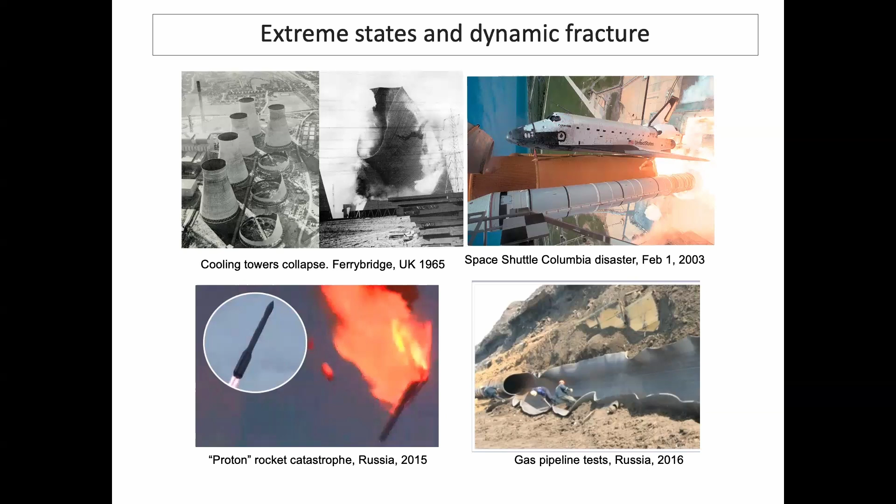It's obvious that crack propagation problems are very important for the industry, especially for extreme states, which are now part of modern technologies. I just want to remind all of us that we still don't have engineering standards for extreme states and for dynamics, and this creates a gap between the academic understanding and engineering applications.

I'm going to talk mainly about the unstable behavior of parameters controlling the dynamic crack propagation, and about an approach which helps us deal with these instabilities and actually simulate them.

At the end of my talk, I want to show a beautiful analogy which allows us to interpret this instability, and came to the conclusion that these instabilities are actually natural, and can be easily understood.

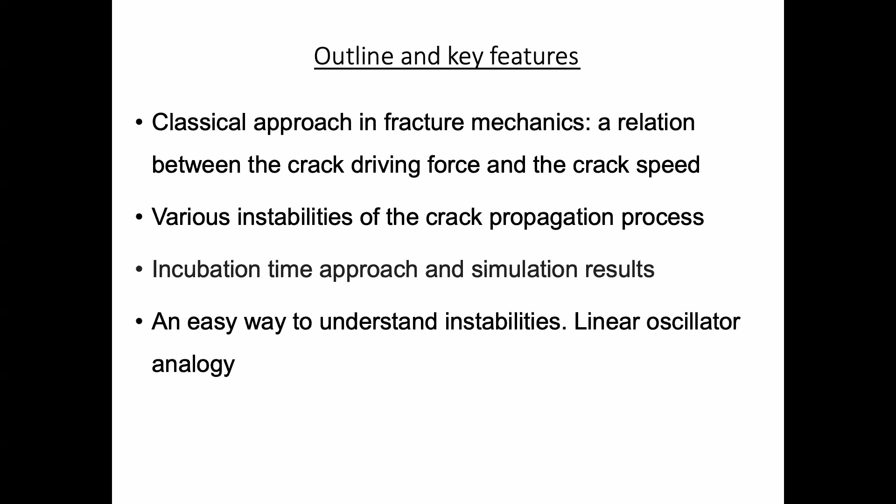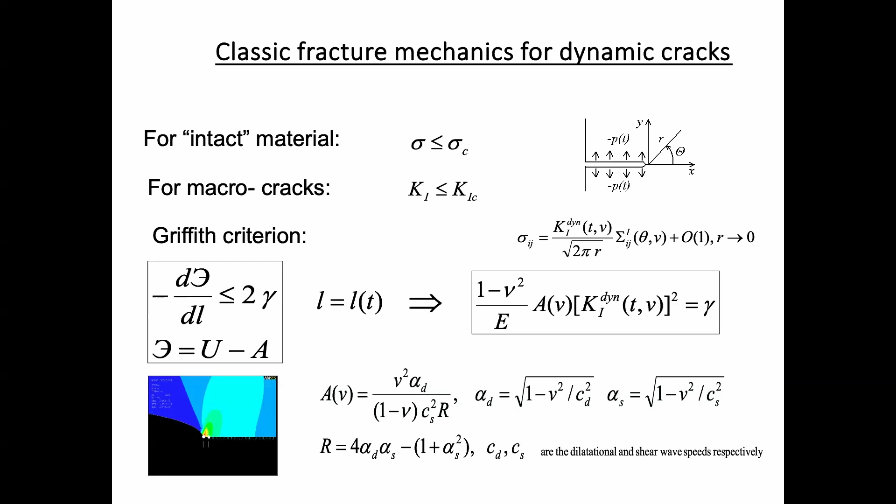This is a classical, well-known approach, and it can be reformulated in terms of the stress intensity factors. That means in these terms we will have the right parts of our relations dependent on the strain rates and the crack velocity.

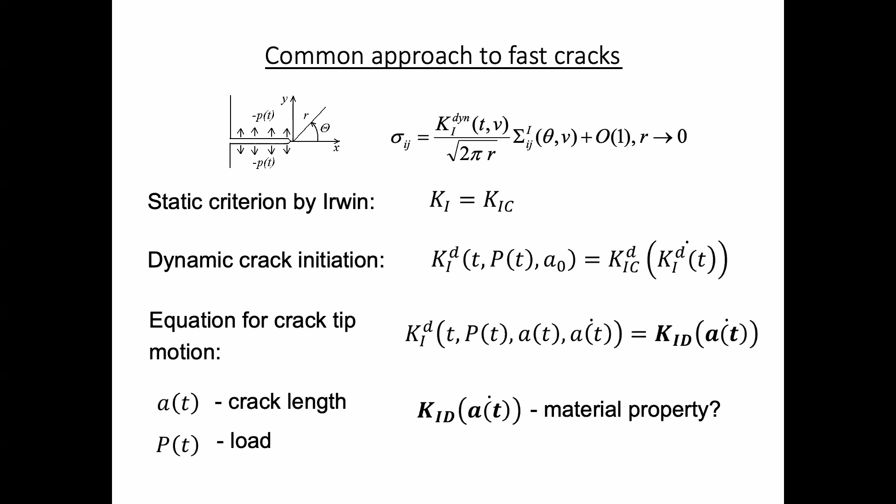So the classic approach can be summarized in these facts: it predicts that the maximum speed a crack may attain is the Rayleigh surface wave speed. This follows just from the previous relation between the energy flux and the crack velocity.

It indicates the unique relation between the crack driving force, characterized in terms of the dynamic stress intensity factor, and the crack speed. The classic model and the majority of its modifications include rate dependencies considered as a material function.

So the static value is just substituted by complicated functionals, for example K1D, which is supposed to be dependent on the crack velocity and to be a material property.

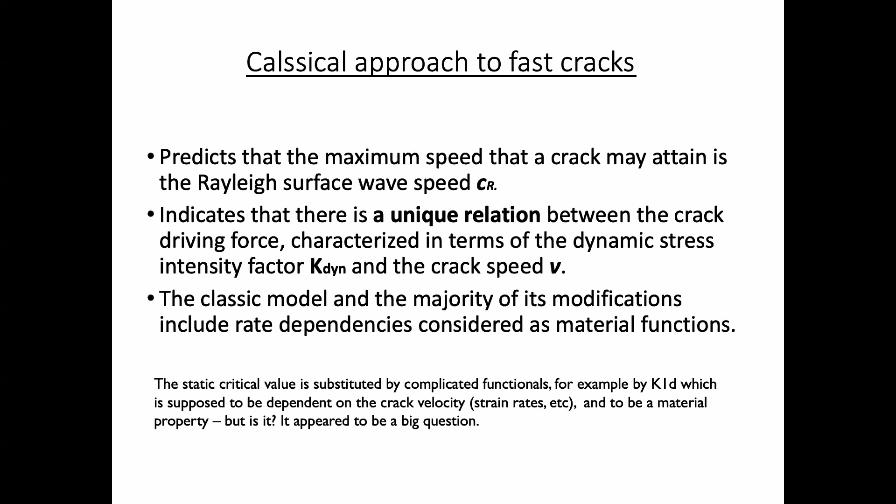But is it actually a fact? This appears to be a big question. So there are some examples of different views on this matter.

I just used the most classic works from the most famous scientific groups. The first one, Irwin and Dally and some other research groups, tried to establish this K-V relation as a smooth and continuous relation for some materials.

The group by Professor Kalthoff and other research groups found that this relation is actually not unique, and it depends on the geometry of the samples. So there are two samples for the same material, and they will show us very different relations.

And the group of other scientists, represented by a series of papers, came to an even more dramatic conclusion: that actually there is no dependence between the energy flux and the crack velocity. They observed straight lines, where the energy flux or current stress intensity factor is characterized by large variation when the crack velocity is almost constant.

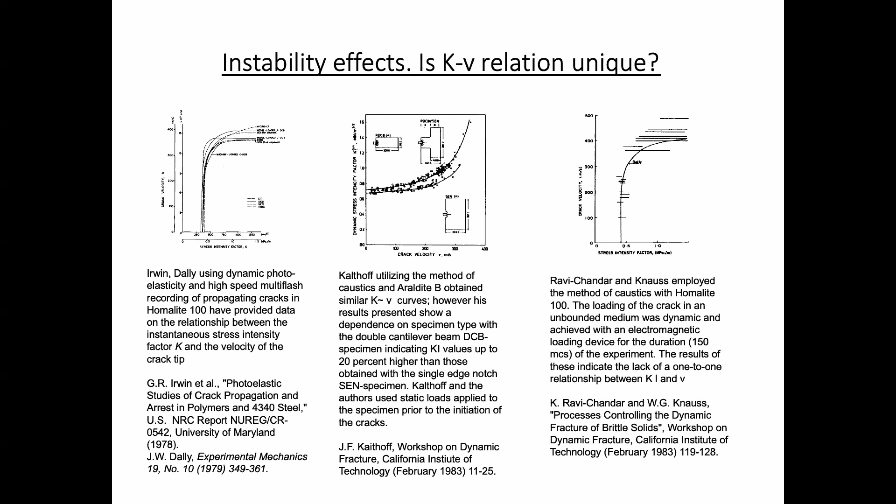Another example of instability is the crack velocity oscillations. This can be represented, for instance, by the investigations of Professor Fineberg - a well-known result showing that crack velocity exhibits unstable behavior.

This instability was observed after a certain critical point, after the critical value of the crack velocity, crack propagation.

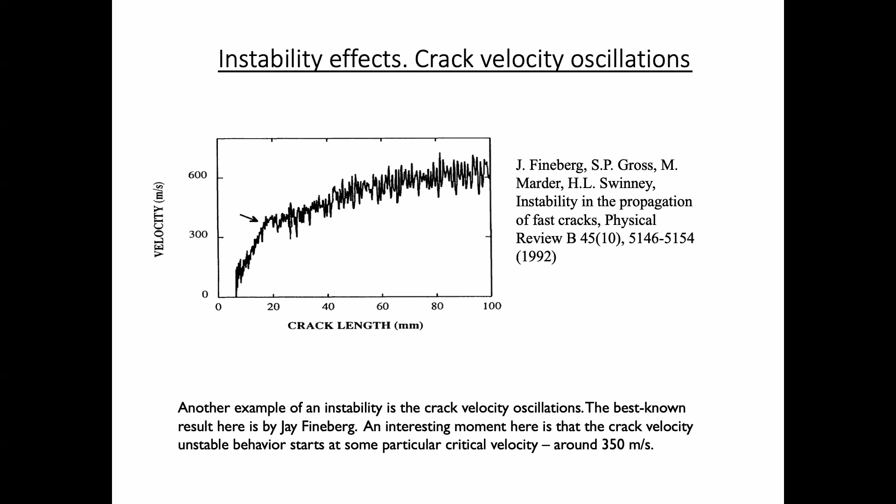Another example of crack instability can be observed even during the start of crack propagation. It's more or less clear that experiments measuring K1D, the starting value of the stress intensity factor, give very different values.

Even for the same material, we can observe K1D that are bigger than K1C or less than K1C. This was discussed in numerous works, the most famous being the work by Shockey, Erlich, and Kalthoff about short pulse fracture mechanics.

They definitively established that for many materials, K1D can be less than K1C, against the prior view that K1D is always bigger than K1C.

For some cases, even non-monotonic behavior of K1D is observed, like in papers by Professor Kalthoff, when he measured the non-monotonic behavior of K1D with strain rate, which first became less than K1C, and then went up and greater than K1C.

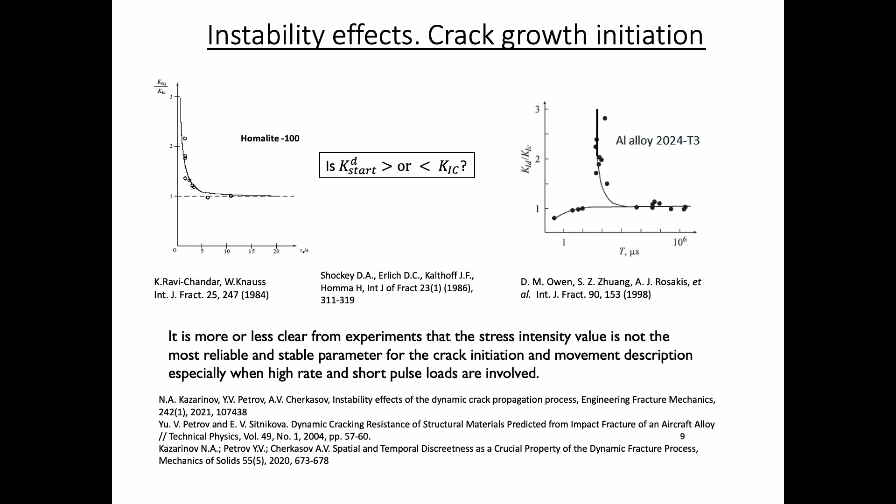We can deal with these effects if we take into consideration some characteristic times, and this is an approach we are developing in our research group.

This approach is essentially non-local in time and in space, so it is based on a special temporal and spatial representative volume. We consider the minimal fracture event, the minimal crack jump in our case, which is described by the D parameter.

It's a linear size. In this way, the fracture scale level is set, and we consider crack initiation. When we go to the crack growth initiation problem, we can simplify this approach and reduce it to this simple criterion.

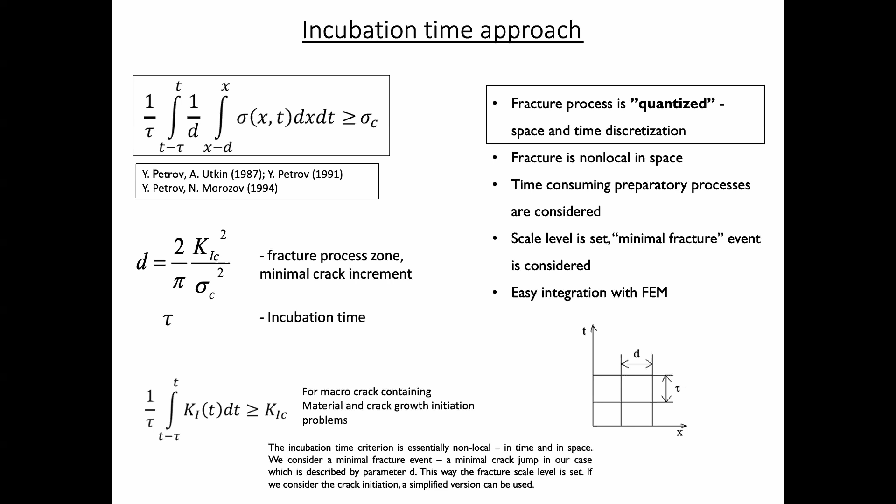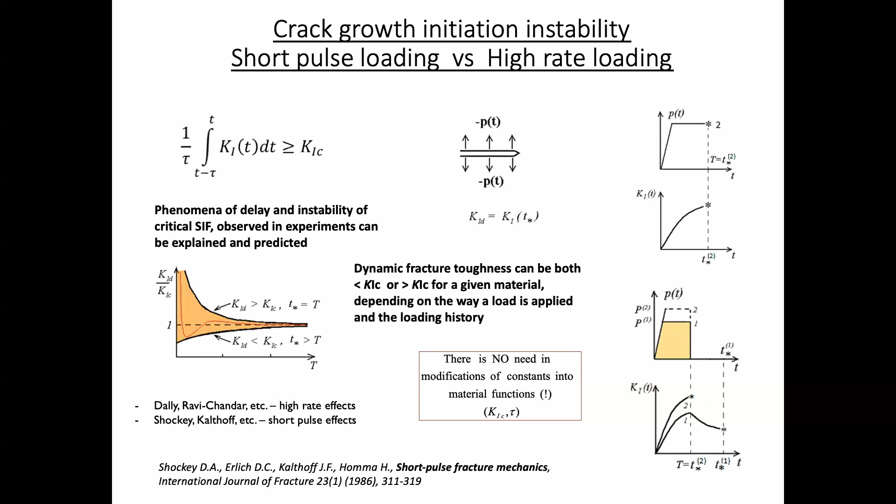So there's no need for modification of constants into the material functions. Only two constants can be utilized to get all these effects.

Let's consider examples of application of the same approach to the crack propagation problem. We consider two problems: the quasi-static loading, which was realized in these experiments, and the problem of impact loading in larger plates realized in the experiments by Ravi-Chandar and Knauss.

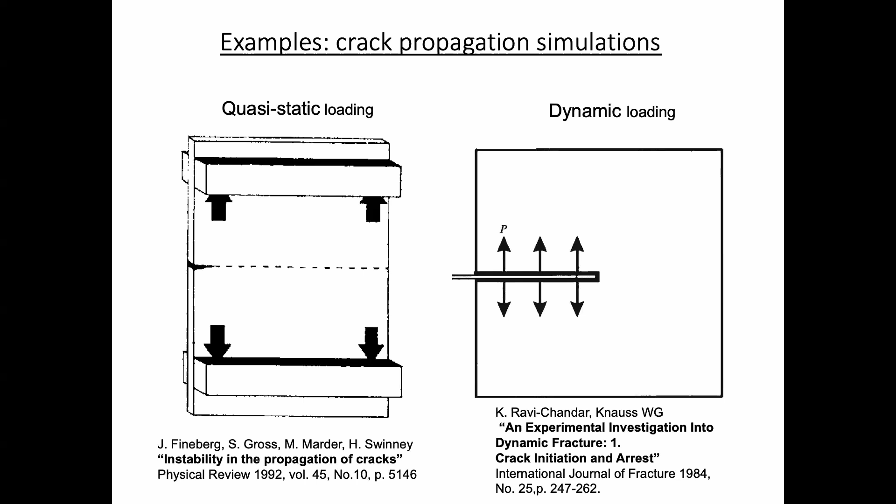The problem can be stated as a linear problem. Small deformations are considered, and no complicated rheology is used—we consider just a linear elastic problem.

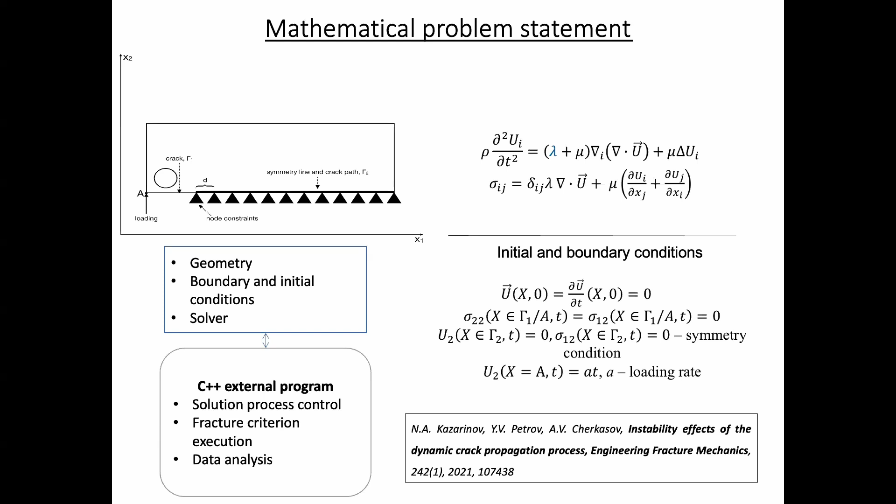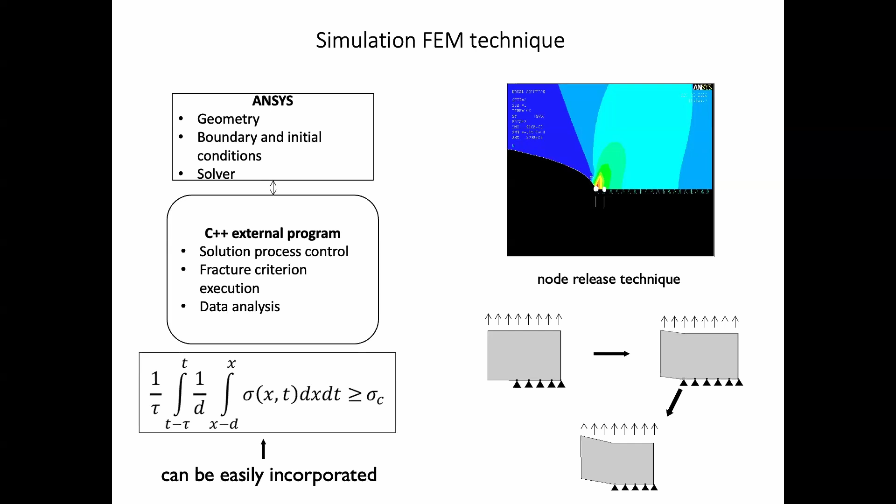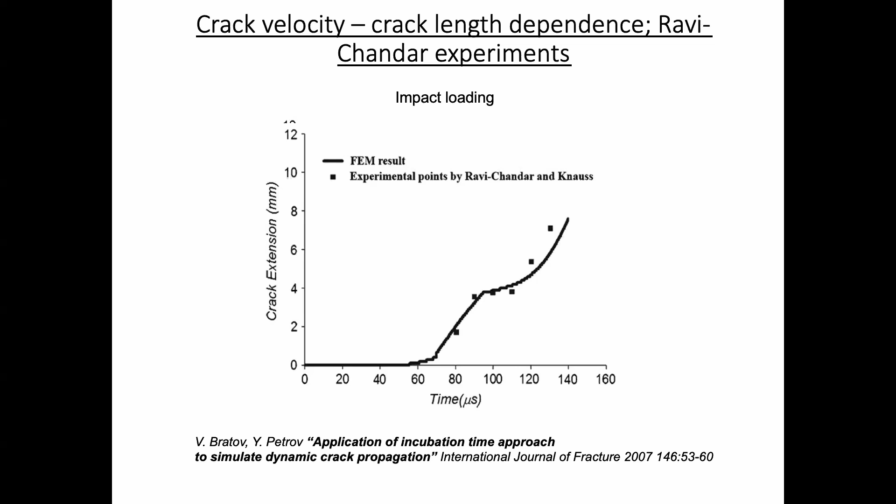This is the simulation technique, and the way we release the nodes according to this fracture criterion. First, the crack velocity in the experiments by Ravi-Chandar and Knauss can be simulated, and this is the result of this simulation, just in the framework of linear fracture mechanics, linear elasticity, and the above-mentioned criteria.

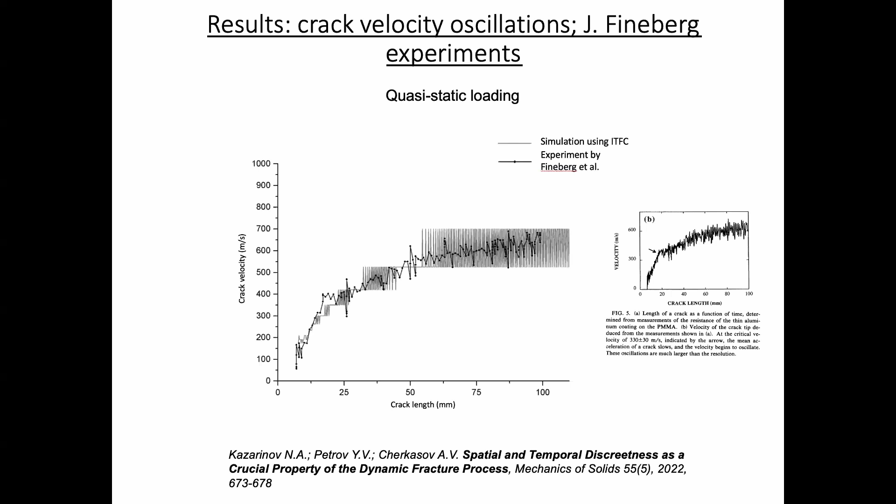And even the critical point, where the amplitude of these oscillations becomes essential, can also be observed here, approximately at the same value.

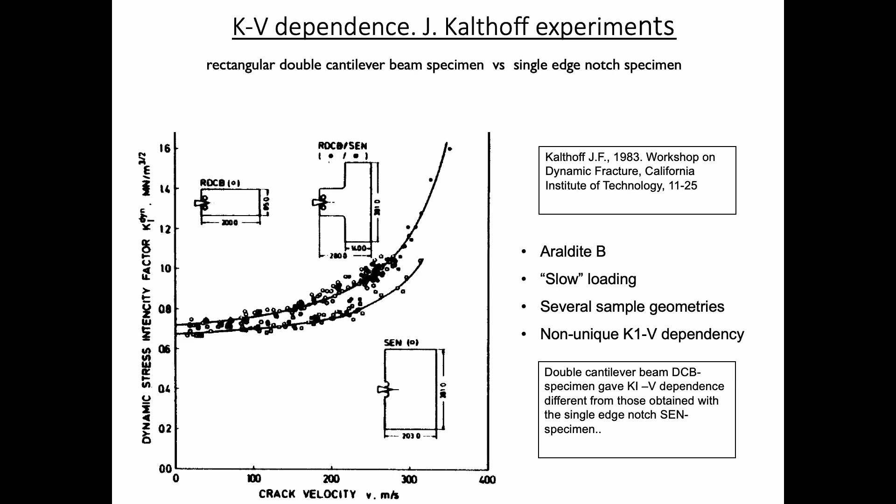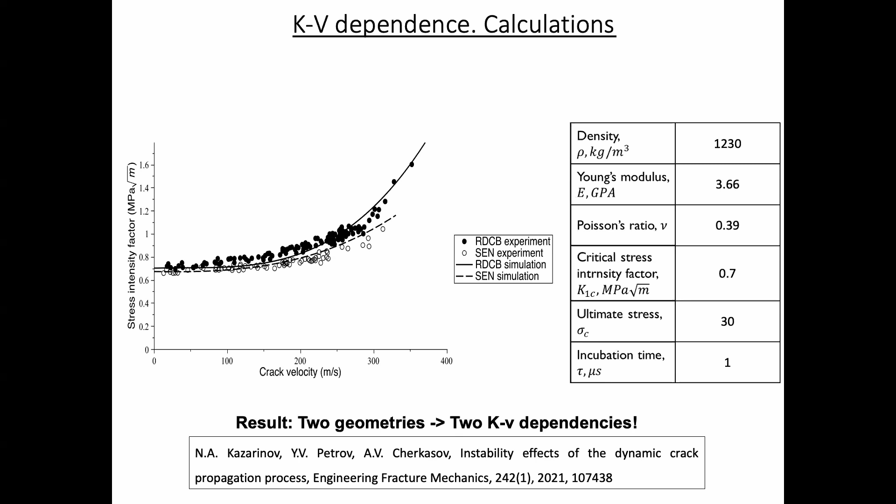Applying the same approach to samples with different geometries, we can get different K-V relations. This is our endeavor to simulate Professor Kalthoff's experiments.

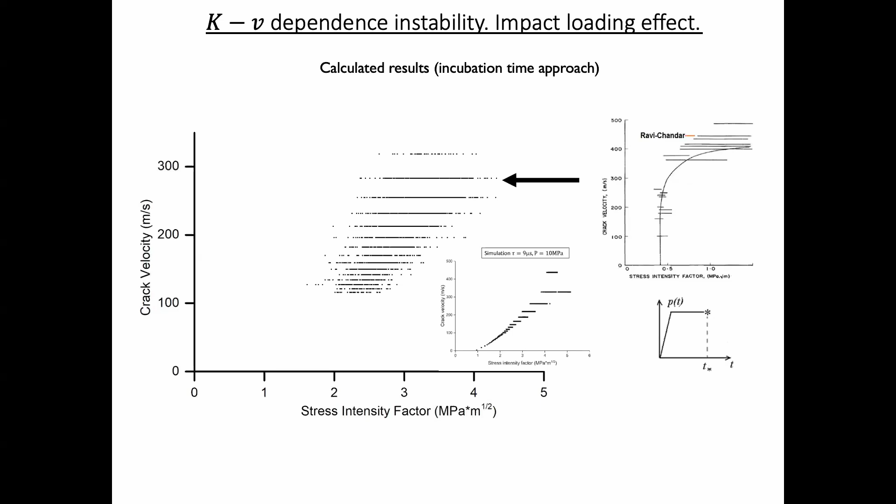The most interesting thing is that in the case of a semi-infinite crack and large plates, we get this kind of relation between crack velocity and the energy flux, or current stress intensity factor. We cannot get exactly in quantities what was observed by Ravi-Chandar and Knauss, but we have this instability in the form that the stress intensity can exhibit rather large variation, while the crack velocity is constant.

So both cases can be simulated: the smooth curve, and this phenomenon observed in the experiments by Ravi-Chandar and Knauss.

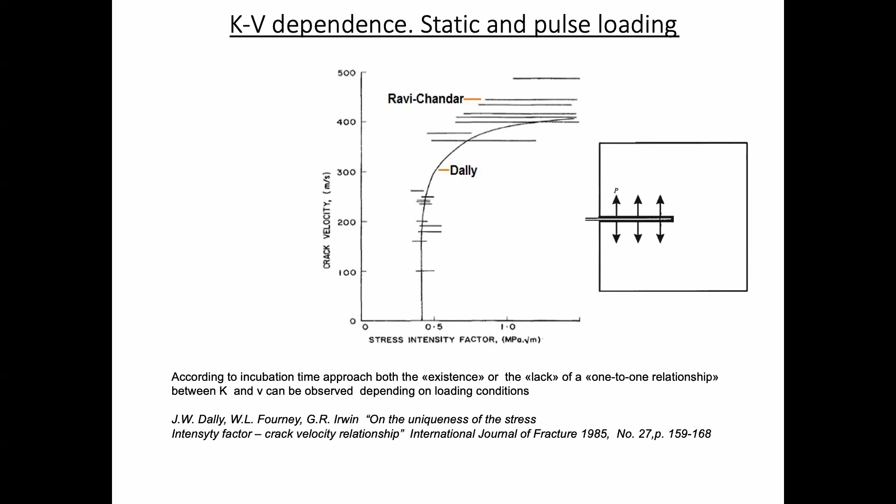And what is between? If we are coming to quasi-static load, then small variation of the current stress intensity factor is observed, and we can apply the classic curve if we neglect this variation. But when we have a pulse load, this variation becomes very essential, and no classic dependency between V and K is observed in this case.

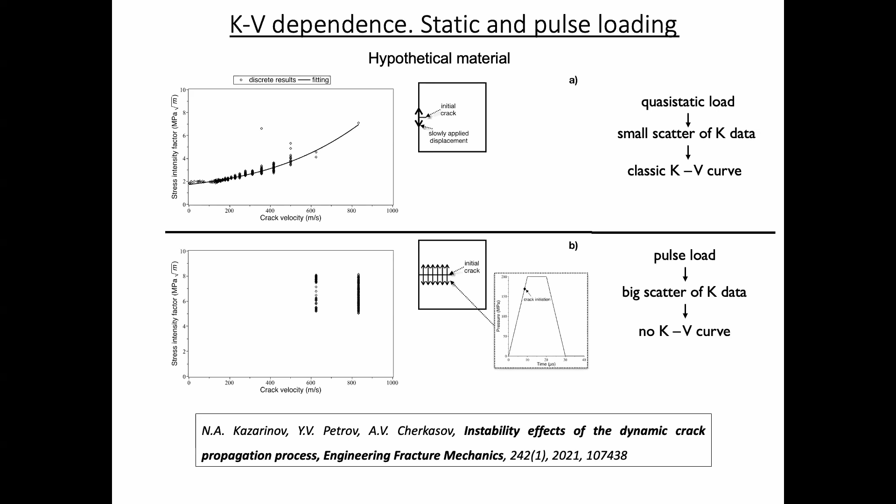Now I just want to show the simplest analogy which allows us to understand all these effects. This is an analogy with the fracture of a simple linear oscillator. On the left we have the oscillator, and on the right the crack initiation problem.

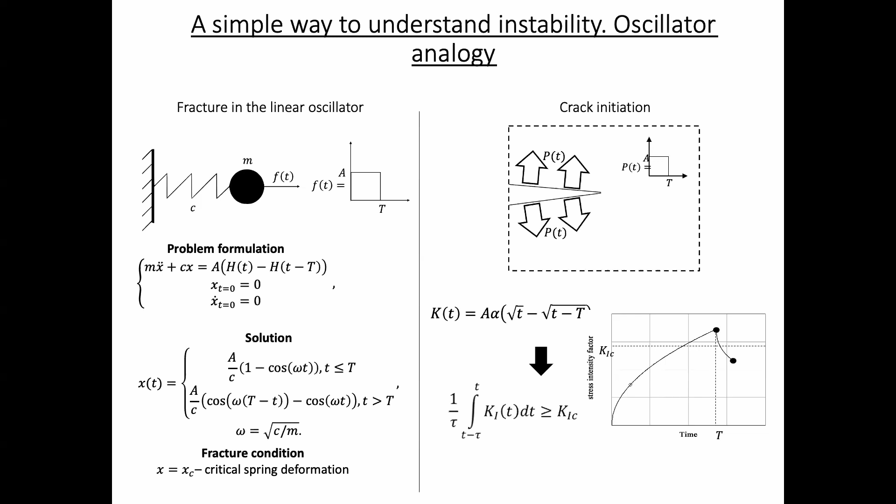Both cases can be analyzed analytically if we take the simplest statement of the problem: in the case of crack initiation, the semi-infinite crack and the larger plate—then all the relations can be obtained analytically, and we try to analyze this possibility.

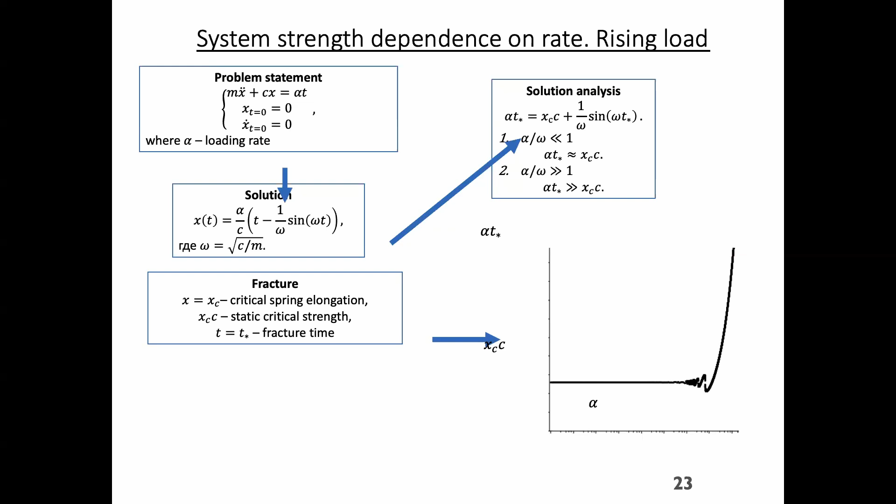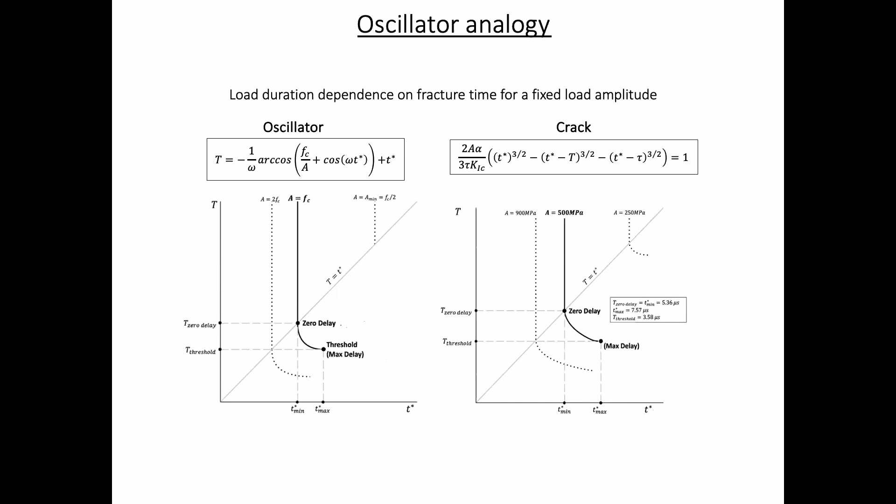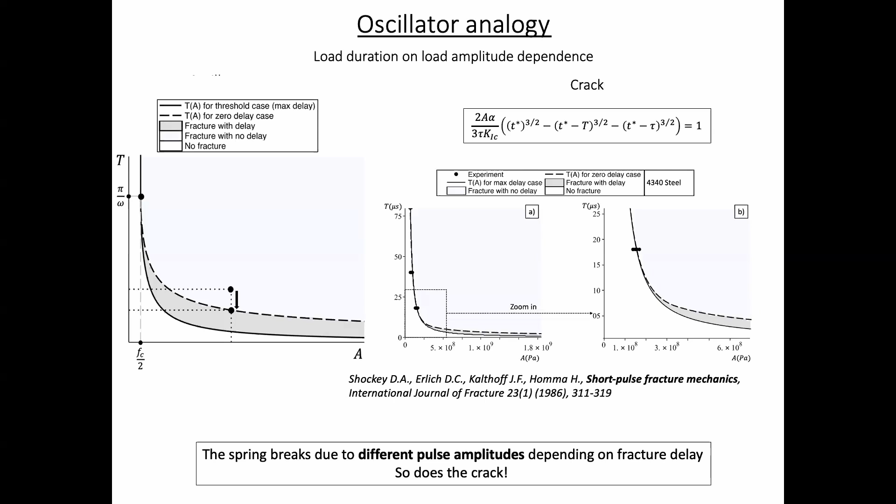We see that the upper curve corresponds to the case when we have no delay, and the lower curve is a delayed fracture. The load momentum, just the square of this rectangular, can also be calculated for both cases, and they are strikingly similar for the crack and for the oscillator.

The upper curve corresponds to the case when we keep the applied load acting up to the moment of fracture, and the lower curve corresponds to threshold amplitudes where we always have fracture delay. If we adjust these minimum points for the oscillator and for the crack, we can associate the oscillator with the macro crack and get the natural frequency of the oscillator.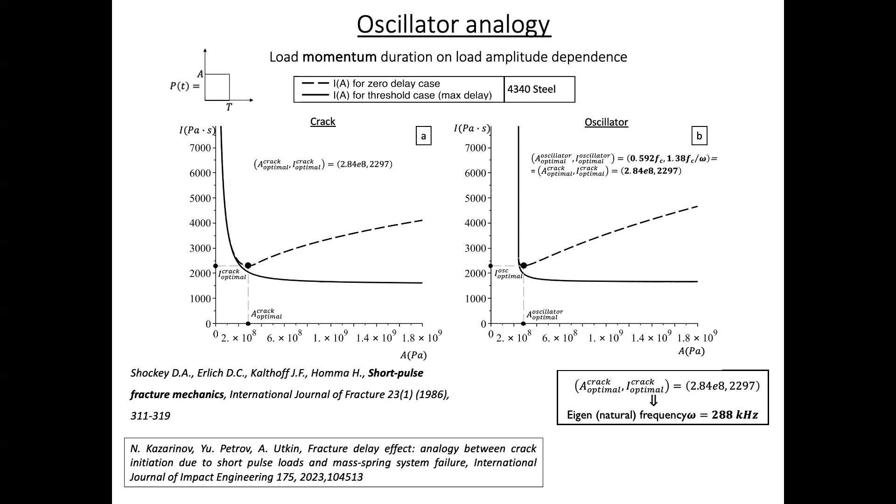It's about 300 kilohertz for the particular materials studied by Shockey and Kalthoff.

Here we applied this oscillator model to spall fracture, considering the sample as a bunch of oscillators, and we simulated the appearance of the spalling crack.

This model is not very complicated. Our bunch consists of 3 oscillators and 5 oscillators. In both cases, the rate dependency can be simulated and obtained, and also the effects of fracture delay can be obtained. There is comparison between what is observed in experiments and what is calculated by this oscillator model.

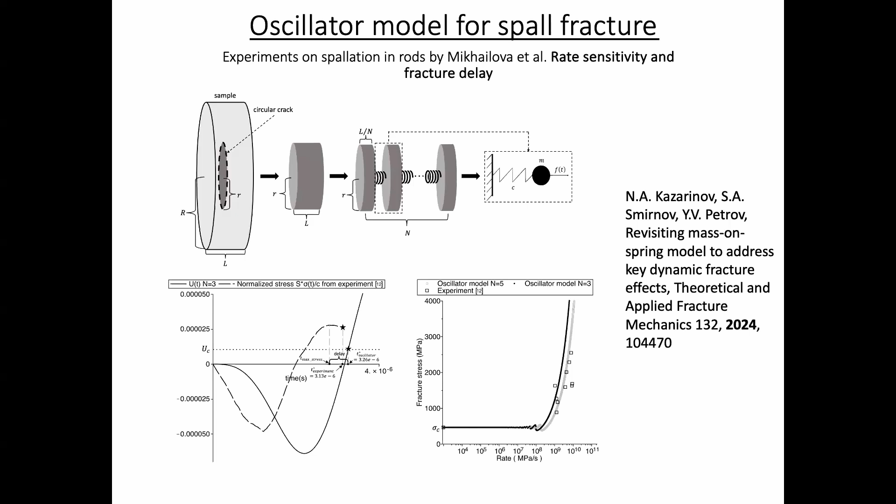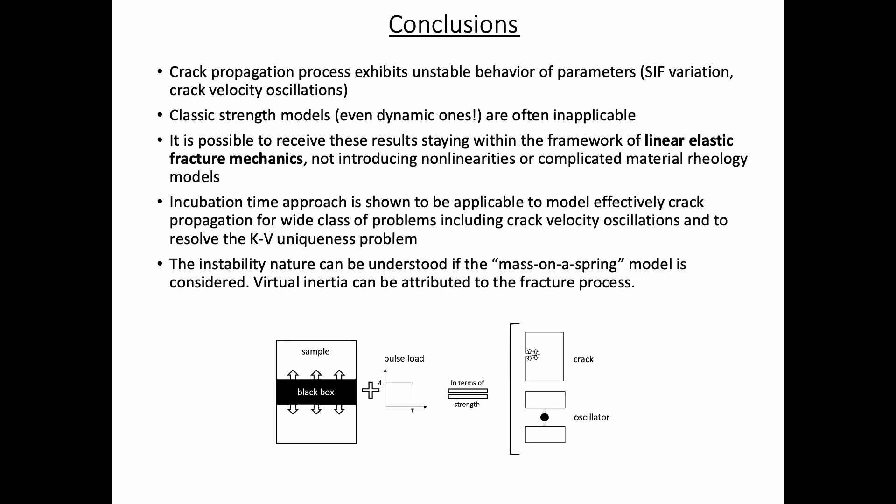So it's a very interesting analogy, which probably gives us an opportunity to understand these seemingly complicated dynamic fracture effects on the basis of some engineering viewpoint. Thank you.